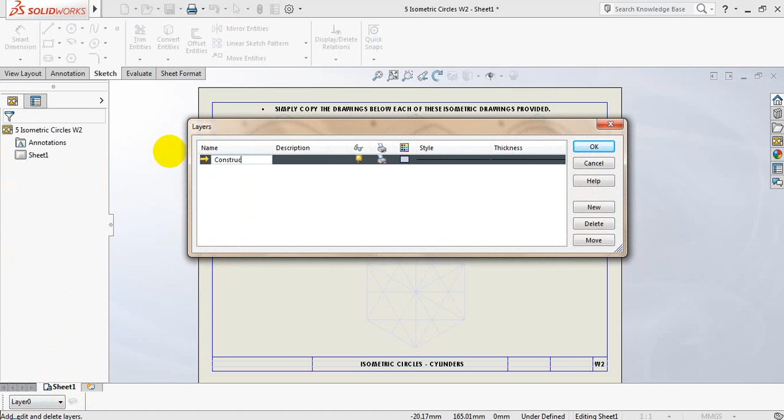I've selected the line tool in SolidWorks, and I have selected layer 2, which I'm going to just rename to construction lines. And the shade I'm using, right, the line tool.

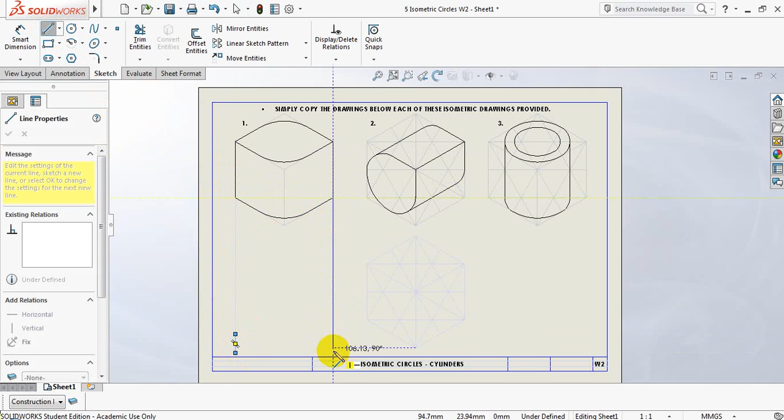Simply orthographically projecting these down will give me accurate lines to work with. And projecting these lines across will simply give me the height of the cube I'm going to be drawing my shape in.

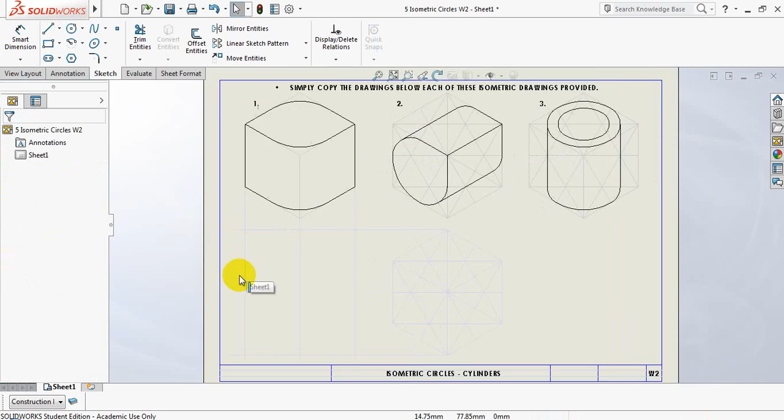Right, so if I zoom in on that fact there, I'll now be able to set my angled lines at 30 degrees. We know that our angled lines have to be at 30 degrees for it to be an isometric line.

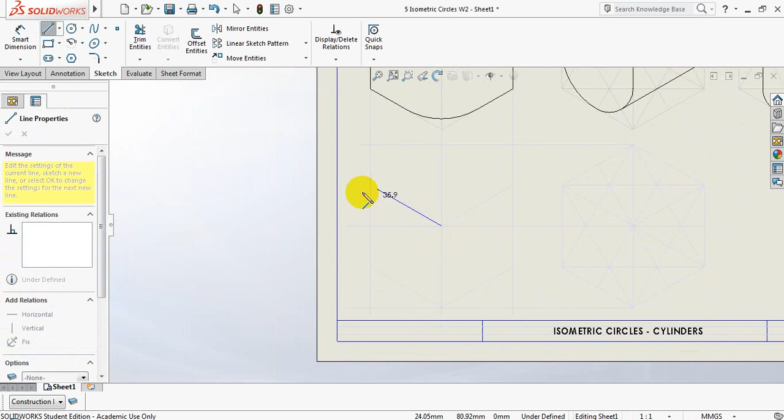Just making sure I'm getting the right points. And I'm going to use a copy tool so that I could copy this line.

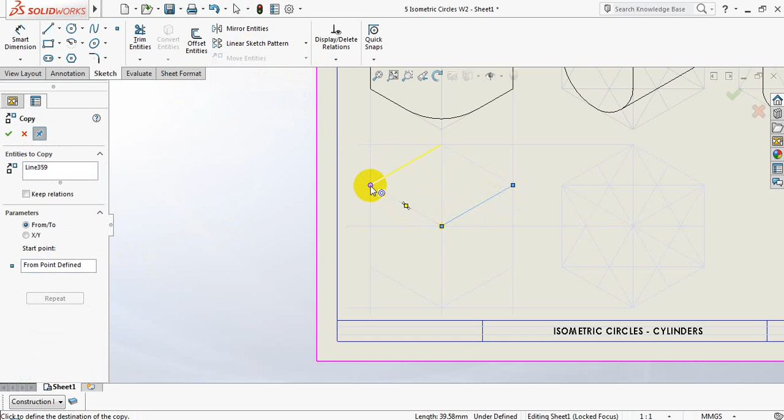Now in your instance, you'll be using your 30-degree set square to find these lines, and you will simply project from the right hand side to the left and from the top down to be able to find the necessary points. If you're not very sure, you could always go back on the video, press pause every time you are unsure, and try and work it out from there.

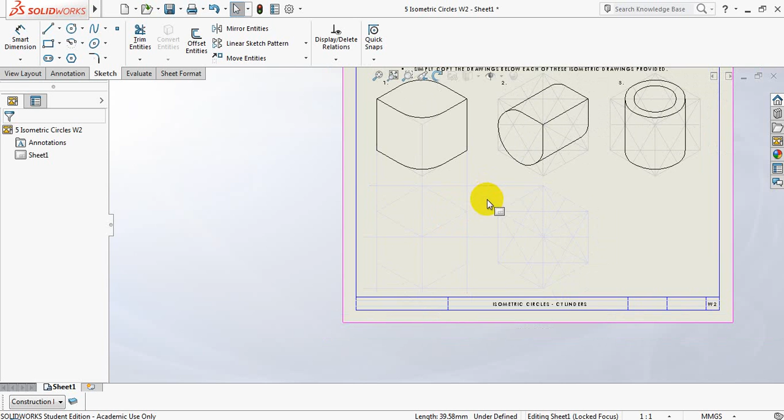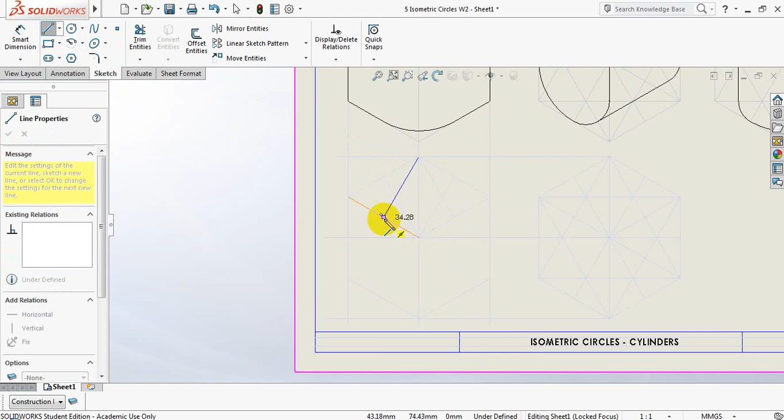Now that I have my isometric square, I'll be able to construct my isometric circles. As we know, we're going to be going from the obtuse angle to the opposite side, or the center of the opposite side. Obtuse to opposite center, and again from the obtuse angle, obtuse to opposite center, obtuse to opposite center.

So we have to recognize the fact that we have an isometric circle, or portions of an isometric circle, on the top face and potentially on the bottom face. We don't work with any of the isometric circle construction or parts of an isometric circle on the right hand face or the left hand face.

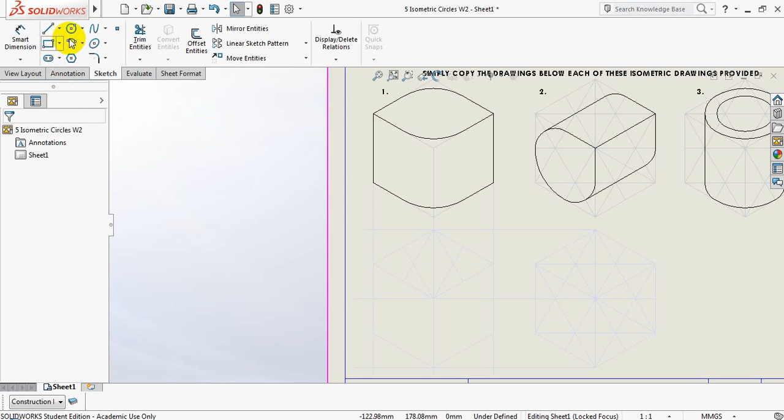In this case here, I'm going to be going onto my arc tool. I'm going to be clicking on the obtuse angle. I'm going to be opening up to the perimeter, and I'm going to scribe my arc.

Let me zoom in on this here for you. I'm going to change this line type to a final line type, just so we can recognize the fact that this arc over here is in fact this arc over here.

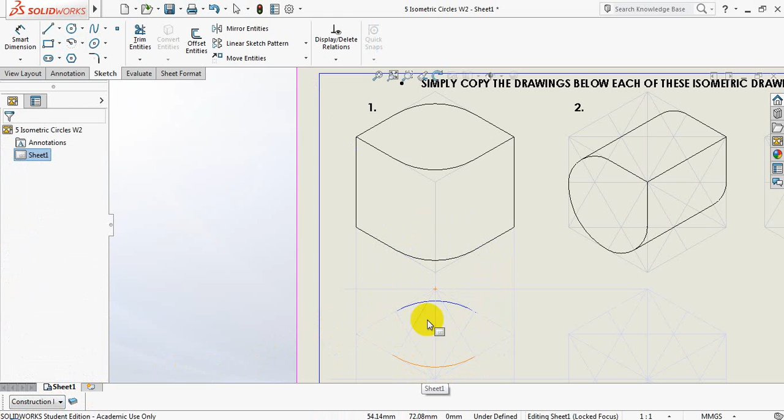I'm going to click on my arc tool again, go to the obtuse angle, open it up to the perimeter, and I'm scribing my arc needed. Yet again, I have to change the line type. And we also recognize that this line over here is the same as this line over here.

Now it's quite simple. We'll be using the actual isometric square to continue drawing this shape. I need the final line. I'm going to go from where I ended off to the corner, from the corner to the arc drawn.

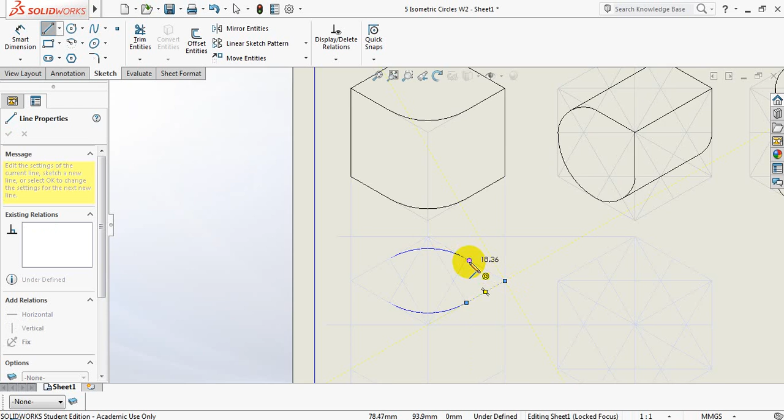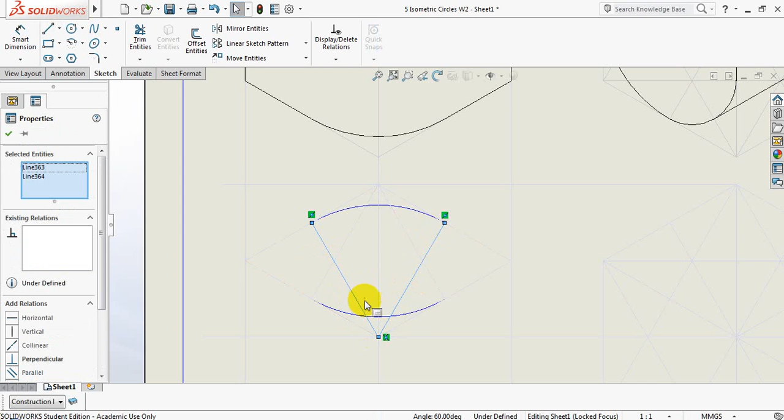I'm going to zoom in over here just to see where I ended off. Over there. Now this should have been back here. Right, so that is a mistake. Just realize that that has to go from one V to the other end of the V. When I say V, I mean from obtuse to opposite center. This V over here. Your arc should extend from there to there.

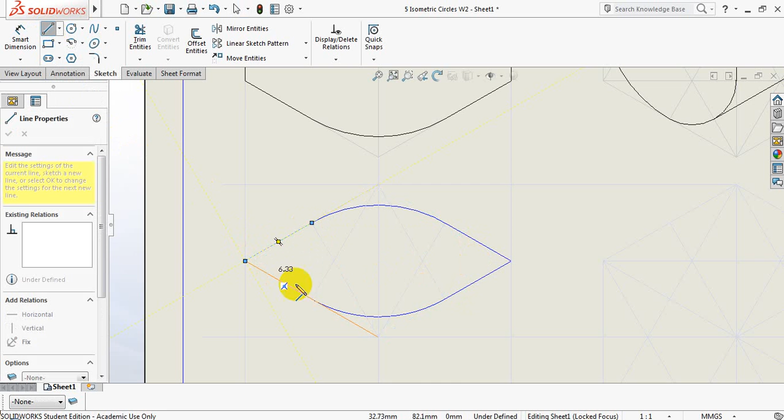We're going to continue drawing lines to the corner from the arc. They're not showing up because in SolidWorks there's already a line there, so I'm going to delete those two lines just so that you're not confused.

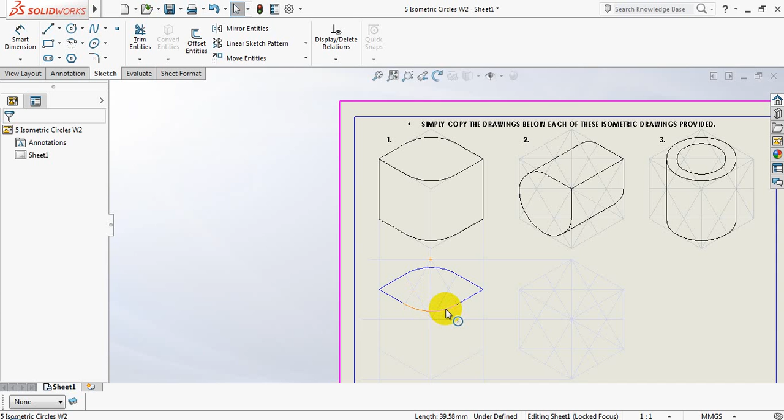Right, now the top surface is done. That surface over there is the top surface of number 1, and we simply have to recognize that at the bottom we are using the exact same curve as this one here. So this will mean that I'll have to find an isometric construction for an isometric circle.

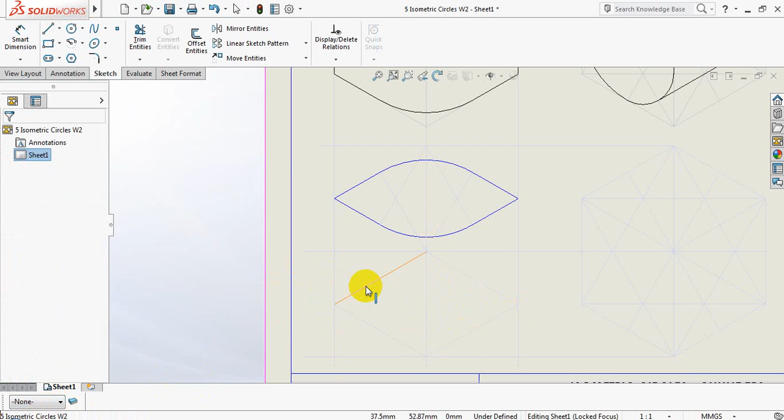In this case I'm going to be using my isometric lines, which you would be using a 30-degree set square. Just convert that to a construction line. And because it's a cube, you'll notice that it actually meets up exactly in the middle along with all the other points there. We're going to go ahead and construct an isometric circle in construction line from the obtuse angle

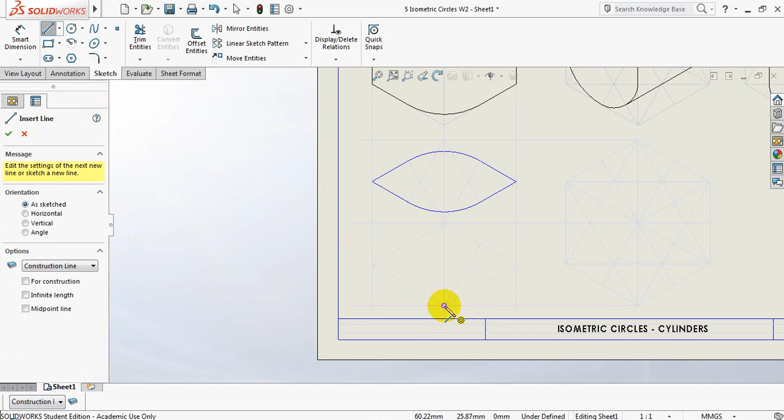to the opposite center. I prefer it if you reconstruct the entire isometric circle rather than projecting the points down from the top. Right, I've got my first V.

I go to the opposite side, the opposite obtuse angle, obtuse to opposite center, obtuse to opposite center, and now I'll be using my intersection points to be able to describe my arcs.

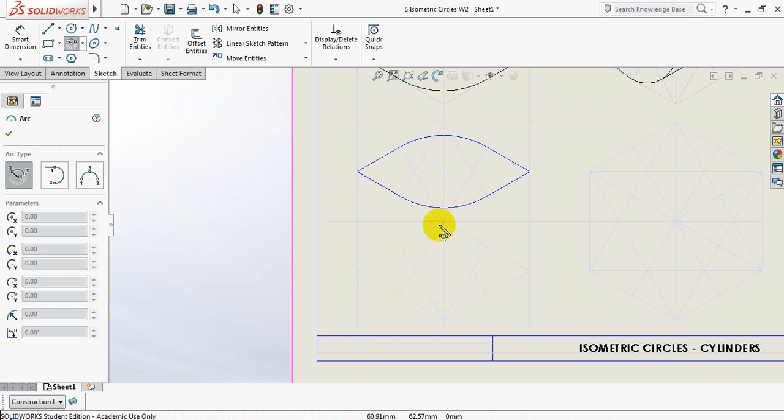Right, in this case here, I simply do need to only get to the actual obtuse angle. I didn't actually need to construct the entire isometric circle or show all constructions. Let's quickly, there we go.

Because theoretically I do not use any of the isometric circles arcs on the sides, so I didn't really need to find these intersection points. Is change this line type.

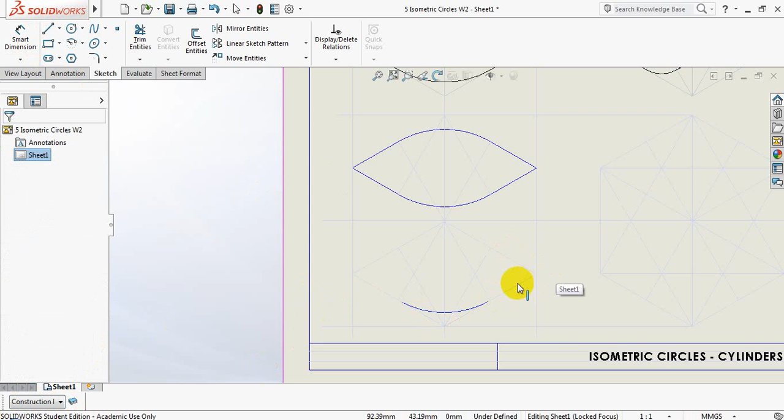You'll see that this fact over here will change as we go along to 2 and 3. Okay, so I'm going to continue drawing this line, final line.

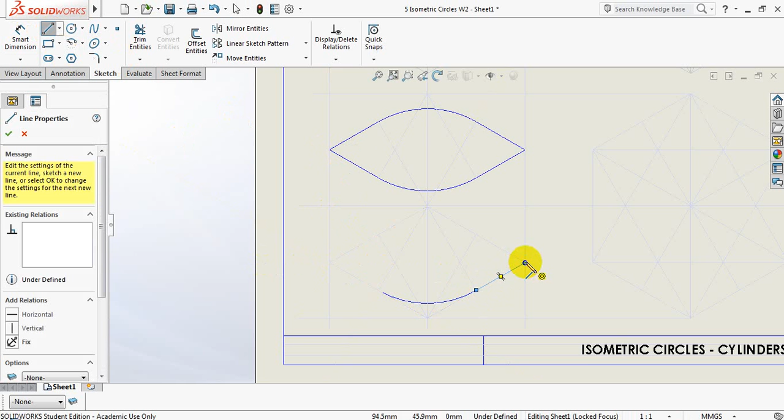That one joins the top. This point to the corner. That line joins the top.

Okay, yet again, SolidWorks has a construction line that is masking the final line. I'm just going to delete those and the final line will show up. And there we have it. Right, so we've successfully completed number 1.

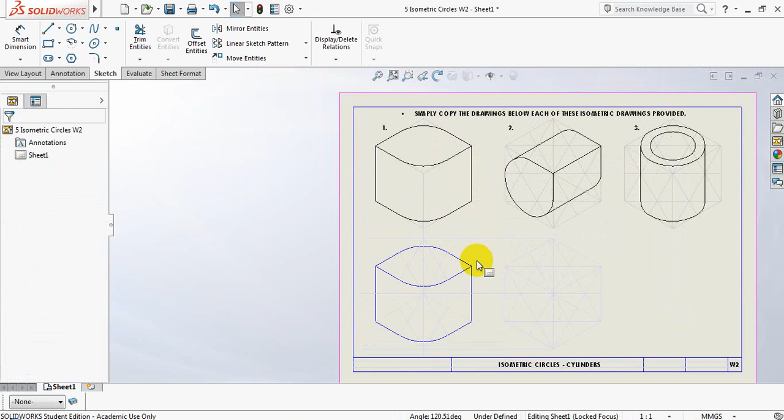Let's move on to number 2. Number 2 looks a little bit different. We'll realize that we are actually using one of the corners over here like we have over here. We are drawing an isometric circle on a different face, but on the opposite side of this corner over here, we are actually using one of the isometric curves rather than cornering it off.

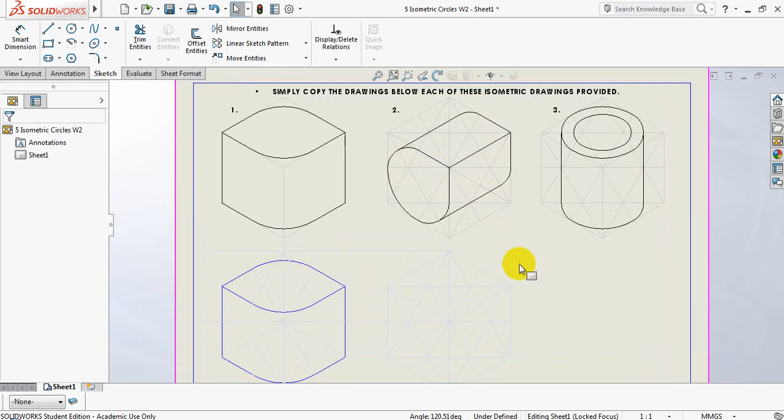I already have the isometric construction of my isometric cube and all the isometric circle constructions inside. Please note that I only have an isometric circle on this left hand face and on the right hand face in the back, not on this face over here or this face over here.

I'm going to start constructing my isometric circle in this one by clicking onto the arc tool. I'm going to go to the obtuse angle, from obtuse to opposite center. I'm going to scribe my arc.

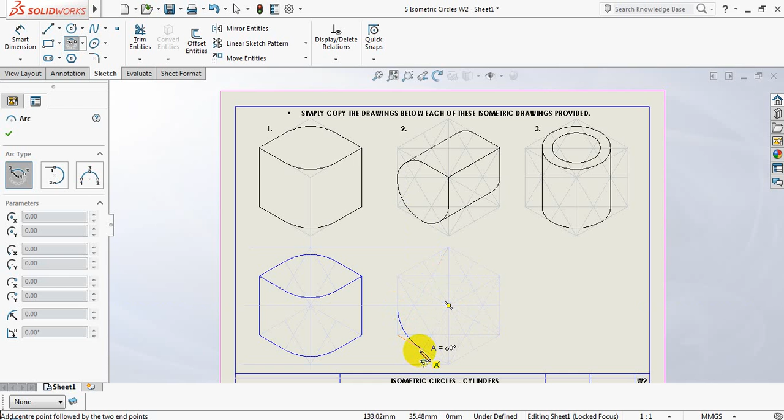And I'm also going to be needing this intersection point being used to the perimeter, sometimes a little bit tricky with SolidWorks trying to find. There we go.

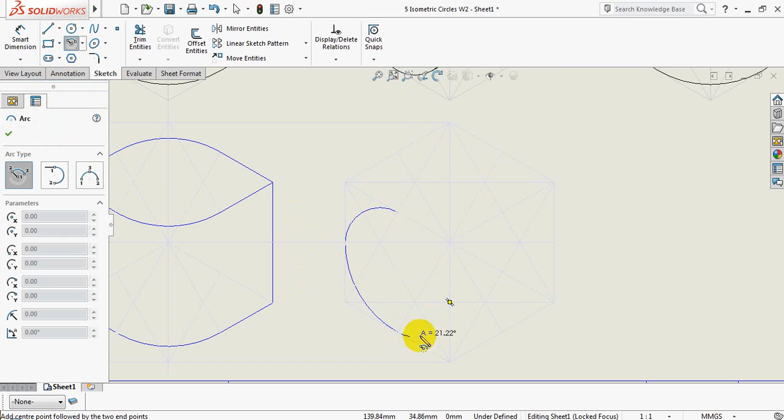Right, and one more arc for the use of through the use of the arc tool. There we go. Right, it's very simple.

Just realize that you do need to construct the isometric circle. There's obviously this arc over here that we're not going to be using as we are looking at number 2. There are actual straight lines to form a corner, and I'm going to be using my line tool to find that. From the arc to the corner, from the corner back to the arc.

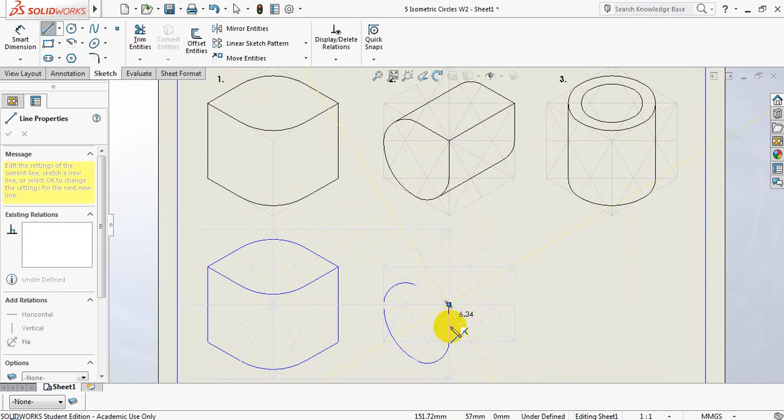Right, there are isometric lines there already, so I'm going to simply delete them to show up. Oh, there's a problem. I'm glad this has happened so that you guys can see that everything doesn't always go according to plan. Let's try and draw this line again. This line here.

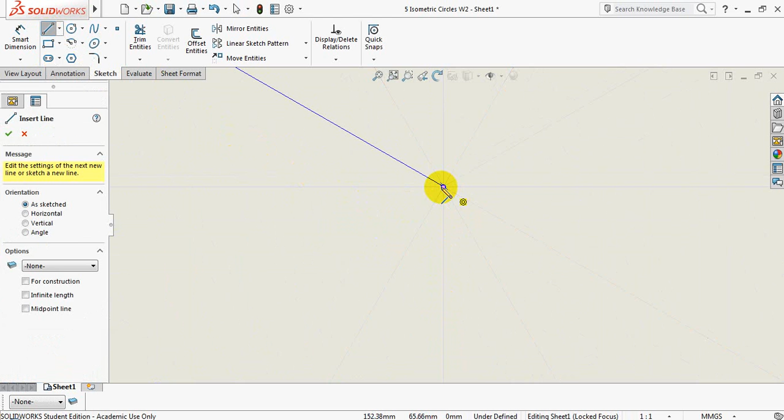Down to the arc, brilliant. There's another line masking that one, I'll delete it.

Alright, so these are joining properly. So our first face is done. The hardest work is done.

Everything that you see is simply drawn in final line, so we can go ahead and draw those straight lines in my drawing. But first I'm going to be drawing and finding my isometric square in construction on the back end of this shape.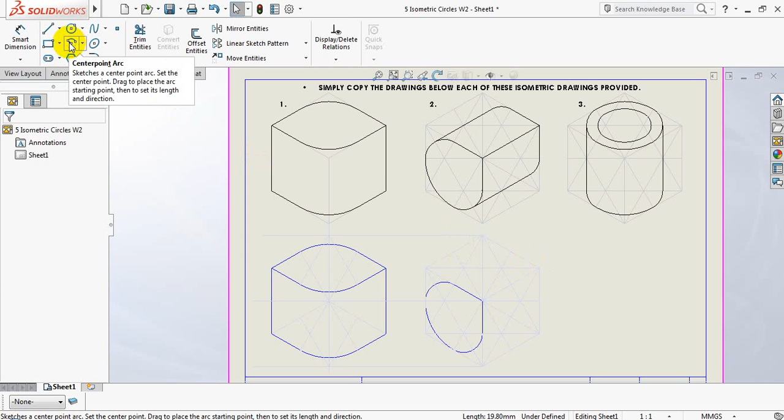I'm going to go back to my isometric centerpoint arc, my arc tool, and choose my construction line. I'm going to go ahead and construct my isometric circle on the back.

Please make sure that you use the correct intersection points. I'm going to run through that slightly: from obtuse to opposite center, obtuse to opposite center - those are the two lines that I'm going to be using.

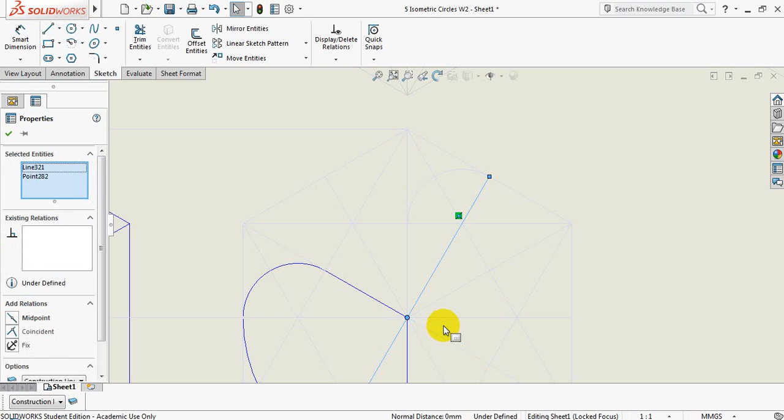And if I go to the opposite obtuse angle, I have that obtuse to opposite center, obtuse to opposite center - excuse me, it'll be this one here. So I'm going to be ending off with these intersection points here: that one there, and that one there.

Let's go back to the arc tool. I'm simply going to be constructing my isometric circle because I'm not too sure which portion of my circle I'm going to be using, so I'm going to just construct the entire circle.

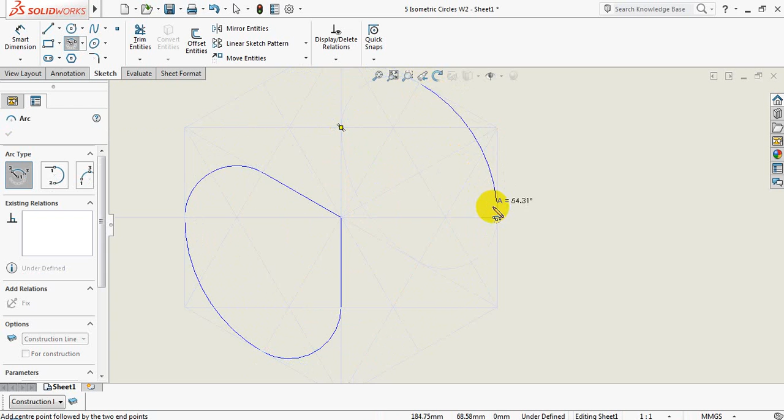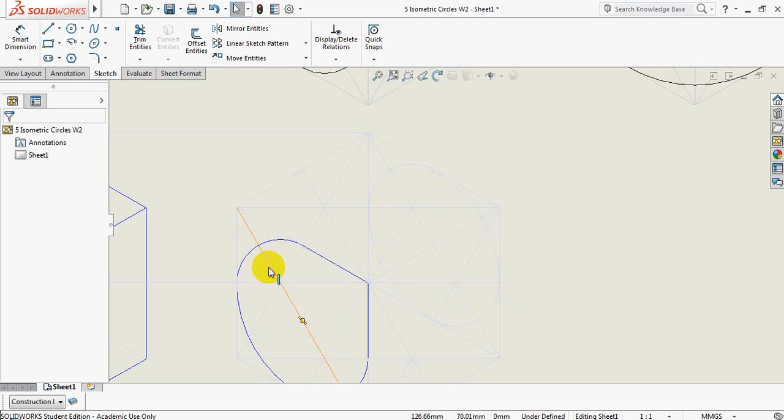Now that I've constructed that isometric circle, please take note that when we are joining two isometric circles, we are obviously going to be forming a cylindrical shape. We do this because it makes sense, using the construction lines created.

The longest line we've created, this one and this one, cuts our arc at that point over there, and cuts the back arc at that point over there. So we're simply going to be drawing a line using the line tool from this point all the way back to the back isometric circle.

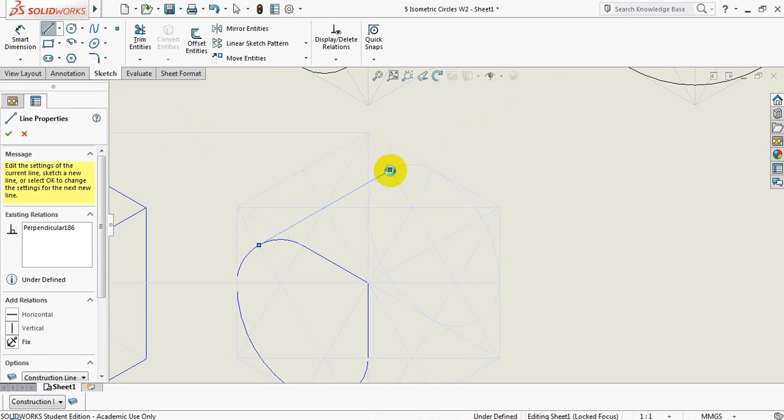Let's change this line to a final line. There we go, we can see it's starting to take shape now. We simply want to draw a nice solid line from this corner to that corner.

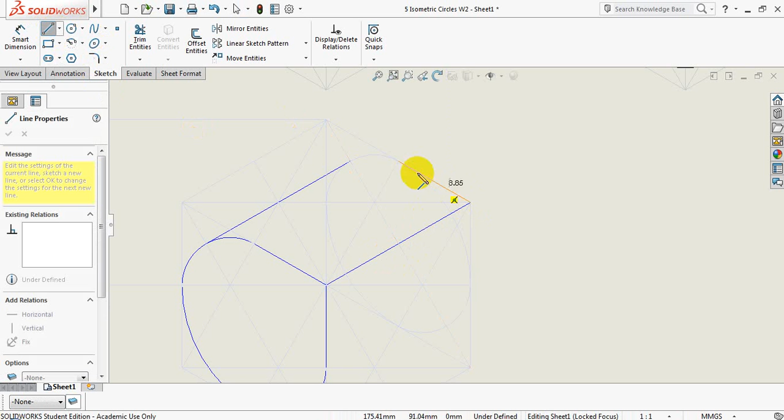I'm going to delete those masked areas. I also have a line going from this corner over here to that point there, and I also have a portion of my arc that I'm going to be using.

Please take note, my entire arc extends right behind the shape. I'd like to only use the portion that I can see, which will obviously be from this point here to this point here. You're not going to be drawing the entire arc in solid or final line.

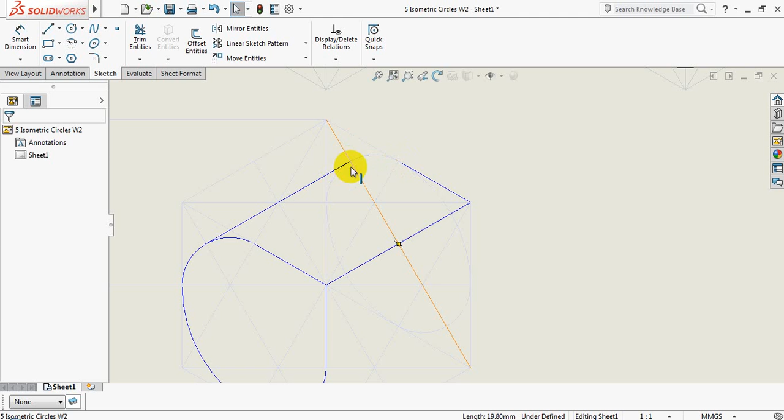I'm going to use my trim tool and just trim this extra portion away. Go back to my arc tool. In fact, I could just click on this line and just change the line type. Here we go, right, we're almost there.

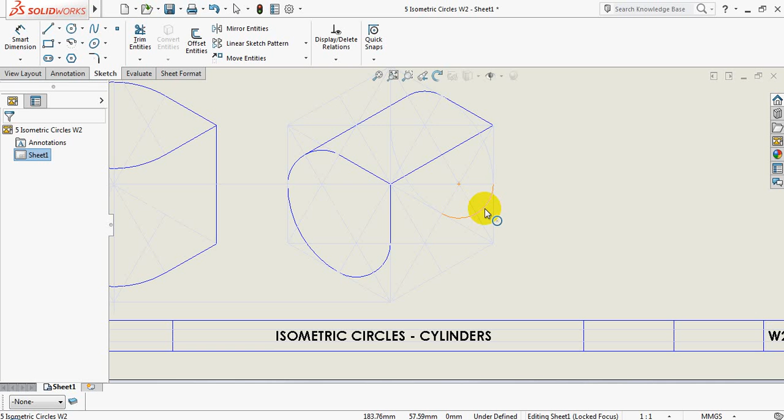One more thing that we need to do: we need to find which portion of this arc over here is going to be used, and obviously the line that's going to be joining the front face to the back face to form the cylindrical shape.

Yet again, I'm joining the two arcs to each other using the one line, where the longest line I can draw from the acute angle all the way up to the opposite acute angle - that would be the longest line I can draw.

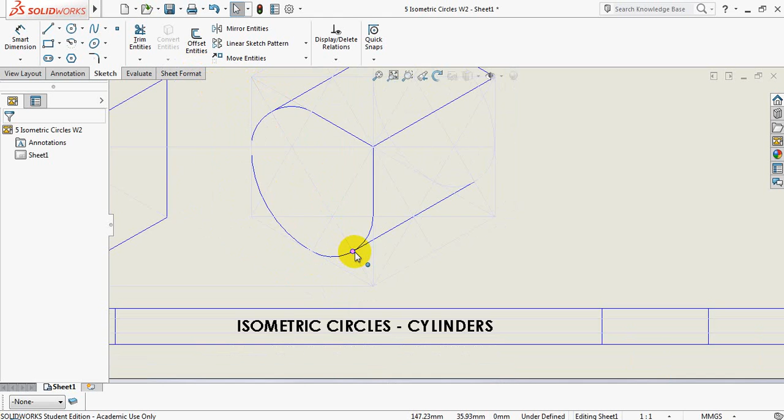Where that point cuts the arc, that's the point I'm going to be using to join exactly that same line, cutting the arc in the back face.

I'm going to use my trim tool, trim away the extra portion that I will not see that is in the back end of the shape. I'm going to use my line tool from here to here.

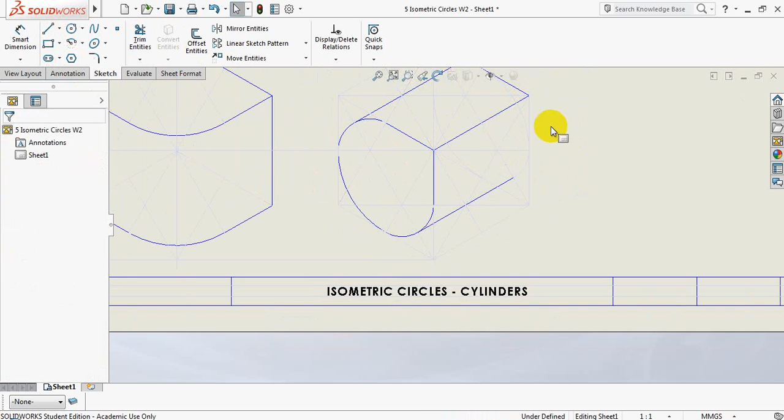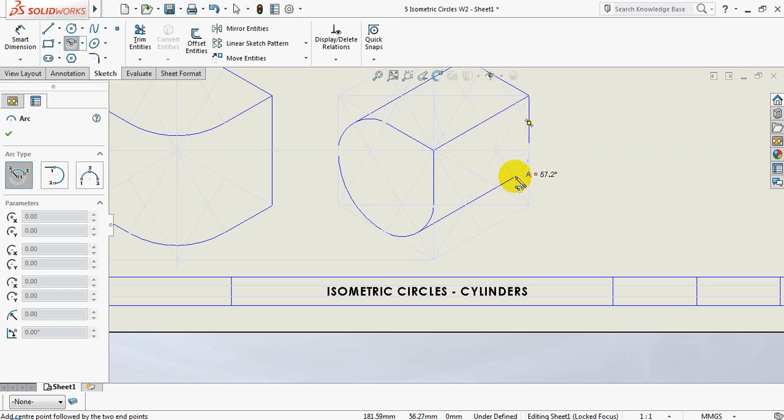Let's try that again, from there to there. And I'm going to be finishing off by putting my compass point on the intersection point, taking it to the perimeter where it's going to be ending off, clicking, and simply drawing and finishing up my drawing.

There we go, we know that those points are coming together, and let's compare the two shapes. There we go, right, that's done.